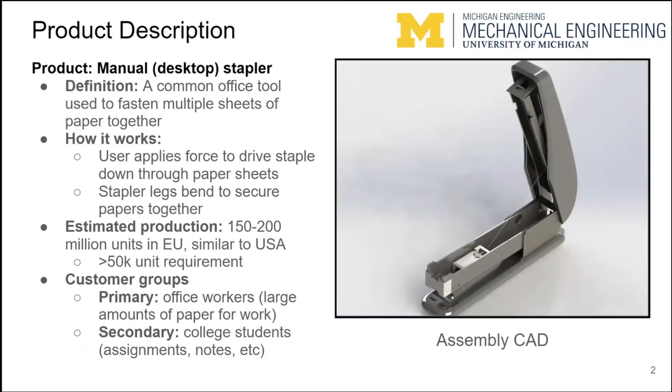There are two major customer groups. The primary is office workers who have to handle large amounts of paper, and the secondary is college students for assignments and notes. The primary function of a manual stapler is to bind papers together.

It does this by first storing a staple strip. Then it feeds these staples by applying a lever force and constraining the staple's movement. Then it inserts the staple into the paper by piercing the paper and then folding the legs. Finally, it assures dependability by using high-quality materials and preventing stapling fingers, and then it assures convenience by enabling an easy reload and using an ergonomic grip.

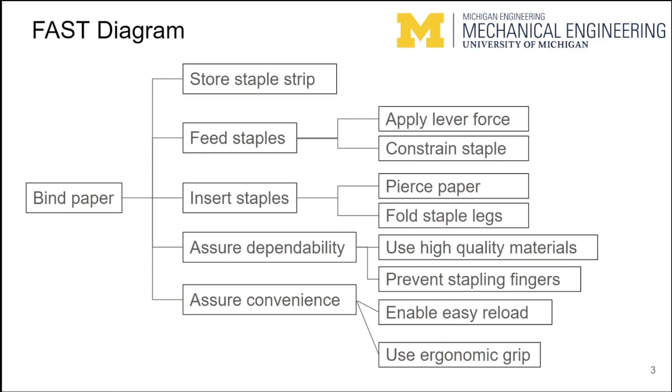There are two major assembly sequences. First is a ground-up design. It has a base body subassembly, then adds the middle supports, then adds the upper body casing. Finally, it adds the springs and then the movement subassembly. This is to minimize any sort of holding down needed for the springs while adding them into the assembly.

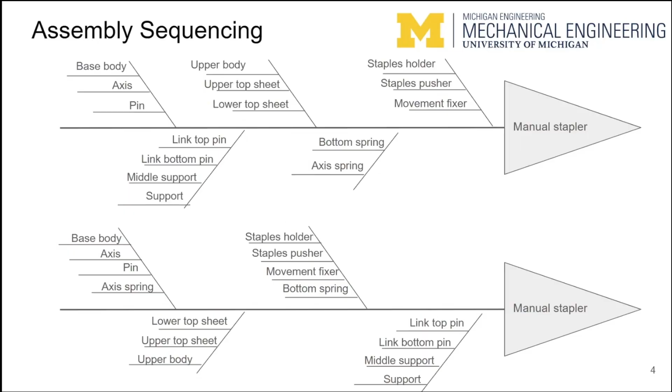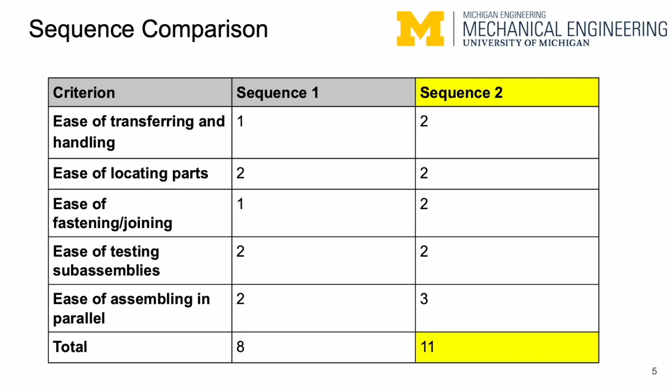The second design is more modular. First, it adds the base body, then all of the upper, so that the casing is done together. Then it adds the entire movement subassembly, and then finally all of the support that goes in the middle while the casing is still open. Sequence 2 is preferred to Sequence 1 as it has a better overall rating from its better performance in ease of transferring and handling, ease of fastening, and ease of assembling in parallel.

Our function component mapping outlines what each part of the stapler accomplishes, highlighting how each part is integrated. As shown in the chart, all components are associated with two or more functions, which relate broadly to either the stapling process, stability, or user safety. The upper body, pins, springs, and staple holder play major roles in the stapling process, whereas other components, like the supports and base body, contribute to the ergonomic grip, easy reload, and preventing finger injury.

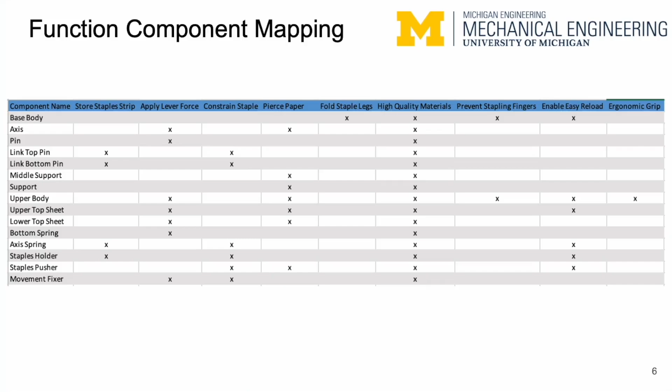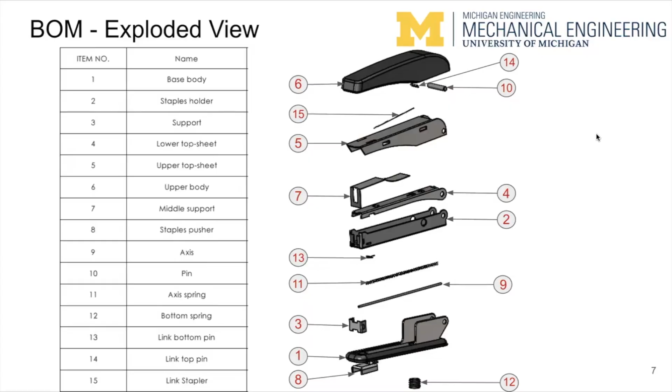A labeled exploded view of the manual stapler can be seen here. It contains 15 parts, including fasteners. The bill of materials will be displayed next. The bill of materials consists of the various component materials used and their associated manufacturing processes. This includes high and low carbon steel, zinc alloy, and nylon. The associated manufacturing processes include die casting, sheet metal forming, injection molding, rolling, and coiling.

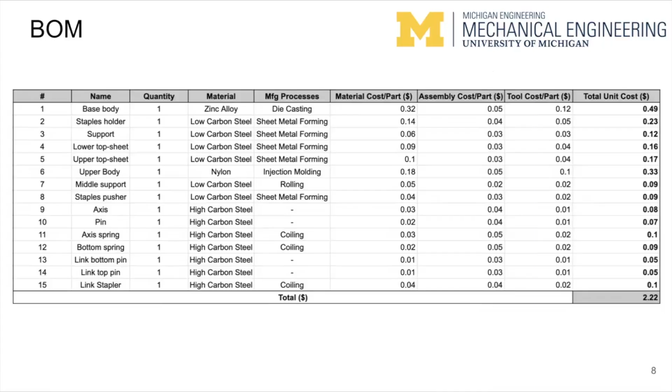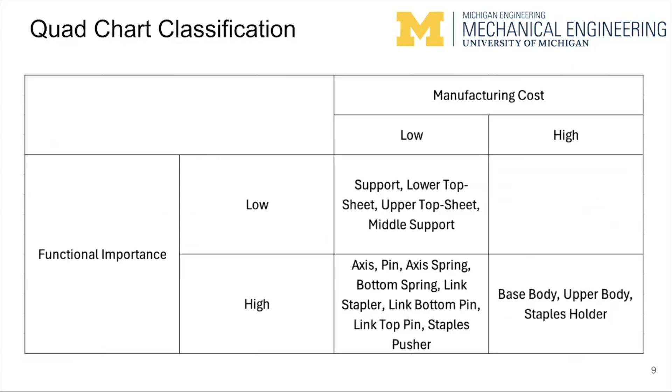The total unit cost was estimated to be $2.22. Similar products range from $6 to $20. Our product design is on the low end of the price range and is roughly 20% of the average retail price for a manual stapler. This is the quad chart slide based on the functional importance and the manufacturing cost. From this chart, we expect a redesign of the high box, including the base body, upper body, and staples holder.

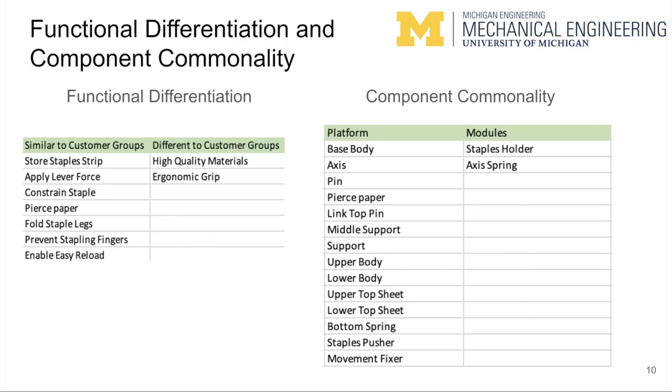Next is the component commonality chart on the right. The first column labeled platform is necessary for all staplers. The second column labeled modules can be interchanged for larger staplers if the stapler needs a larger stash of staples.

Modules and common interfaces. On this slide, we show how we created two stapler variants using the same platform design. The office version is full-sized for frequent, high-volume use, while the student version uses smaller modules for lighter use. For example, the student axis spring is about 25% shorter, which reduces spring force but is still enough for smaller paper stacks. The staples holder is also shortened to reduce staple capacity and material usage. Even though the module sizes change, the mounting interfaces stay the same, so both versions can plug into the same base assembly.

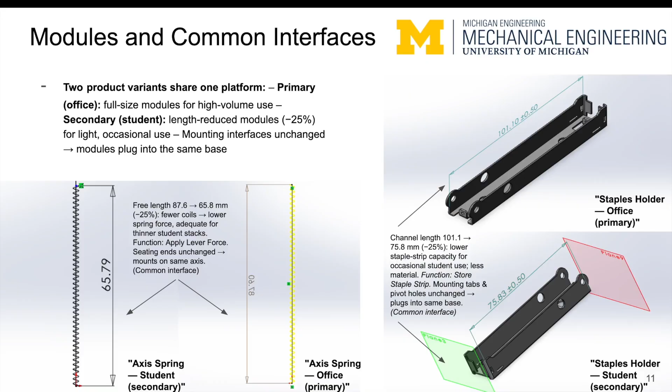This slide highlights the shared interfaces that make the modular design possible. Both stapler variants use the same axis rod diameter and the same base body channel geometry. Only the module lengths change between versions. Because the seating geometry stays identical, manufacturers can use the same platform and assembly process for both products, which reduces cost and improves manufacturing flexibility.

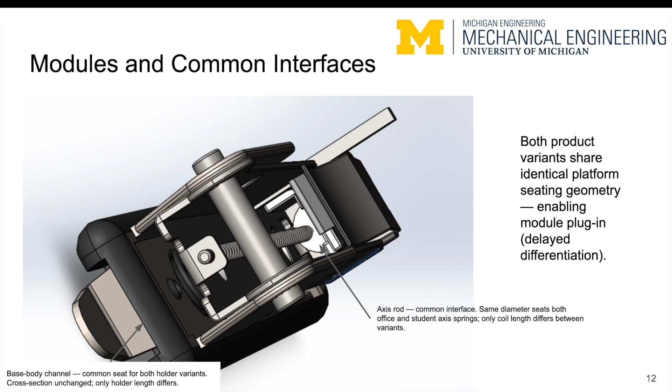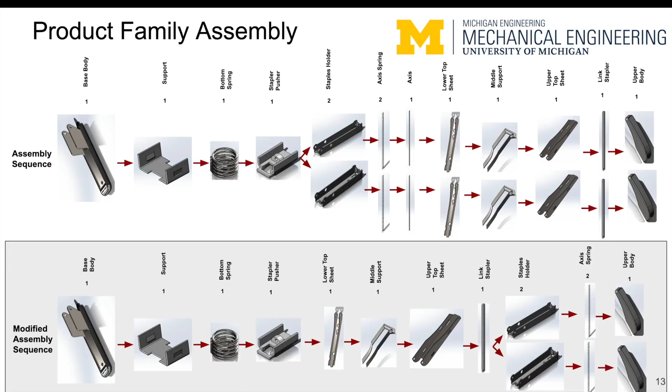Product family assembly. This slide compares the original assembly process with the updated modular assembly sequence. The shared platform components are assembled first, while the variant-specific modules like the staples holder and axis spring are added later. This supports delayed differentiation, meaning the final product can be customized near the end of the production. That improves flexibility, simplifies inventory management, and reduces manufacturing costs.